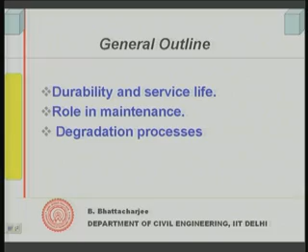Today we shall look into durability of concrete. So far we have looked into strength, and now today we will look into some aspects of durability of concrete, degradation processes and attacks on concrete. In general, the outline of our discussion will be what we understand by durability and service life, then we shall look into role of maintenance and some of the degradation processes.

Let us try to define durability. One thing so far we have understood is that a concrete structure can remain stable, and strength is a factor which actually decides whether it will be safe and stable against horizontal and vertical loading, gravity loading and horizontal loading. But this is one issue, as something strong can also be attacked by various kinds of aggressive agents present in the environment.

So durability relates to these issues. Deterioration can take place because of some chemical attack from the environment. The concrete structure shall survive and serve its function during the period of intended design life. We will try to define the life of the concrete. First of all, we define intended design life. If you remember, we talked about the life of the structures, that it's the life for which the structure should act, for which it should function.

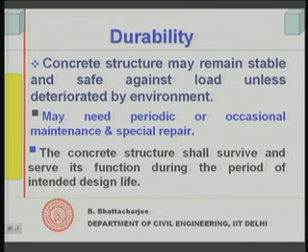There can be several other ways of defining life. Service life is normally defined with respect to elements. Now, we can define the service life in such a manner that it should serve its functions during that period of time satisfactorily. So, in any case, as far as the structure is concerned, it shall survive, should remain stable and serve its function during the period of intended design life.

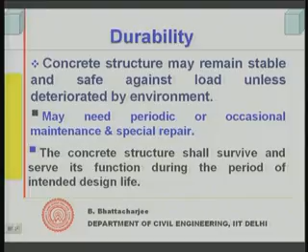And of course, we will be doing some maintenance during that period of time. It is not like you build a structure, whether it is a building or let us say a bridge, and it remains forever without any maintenance. You have to do certain maintenance, and when you do maintenance, the structure should serve its function during the period of intended design life satisfactorily.

Let us formally define durability. Durability of a structure, component, or any material, any product, etc., can be defined as its capability to maintain a minimum performance level over the specified time when exposed to a degradation environment. So what is it actually? Durability is related to environmental degradation.

When you expose a concrete structure to the environment, it would actually be attacked by various aggressive agents in the environment, and this would mean it has to survive such attack during the intended design life period. So durability is related to its capability to survive the environmental degradation and maintain a minimum performance level during the specified time. That is what we call durability.

There is an analogy with a human being. A young person can be very strong, but still can be attacked by viruses or can fall sick. So remaining healthy is the part related to durability. A strong person can also fall sick, or be attacked by virus or bacteria, whatever it is. So when we talk of durability, we talk of that kind of action from aggressive environmental agents. Let us see now.

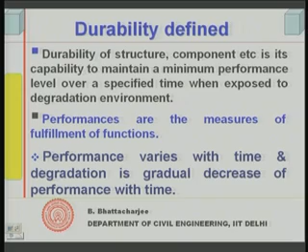So these are some of the definitions with reference to durability. We now understand what performance is, we understand that performance varies with time, and what durability is.

In this context, we would like to define the service life of elements. Let us first look at it philosophically. We think that buildings or structural materials, once produced, are all maintenance free.

Well, they are very unlikely to be maintenance free, because let's say cement, we produce it at the expense of energy, we heat up the raw material and actually embody some energy into this material. So it is not in a stable condition. Stable condition would be when it has dissipated all its energy and has no chance of dissipating any further. Actually, we raise the chemical potential by heating it up, and it would like to dissipate that energy as and when it gets a chance.

So cement reacts with water, dissipating some of its energy, which is why we know that reaction is exothermic. So all the materials that we produce at the expense of energy would like to dissipate it, and therefore they will deteriorate. So concrete cannot be maintenance free.

In concrete, the cement we use has some of its locked-up energy dissipated during the hydration reaction, but still there will be some amount of energy remaining. So altogether it would like to come to a stable state by dissipating all its energy. Given a chance, it would like to react with environmental agents that are present, and get degraded.

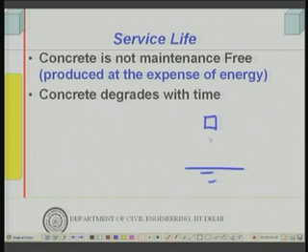An analogy is shown quite often: you can lift a body up. Now if you just release it, keep it in the air, it will come down. This is your ground, you raise a body and lift it up. If you just leave it in the air, it will come down straight away, it will have a direct fall. If you put it on a slope, well...

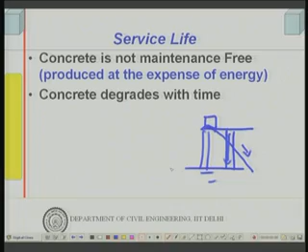It will come down, but at a much slower rate. And if you put a flat surface, built a flat surface and hold it there, it will never come down, because although the tendency in all cases is the same, to come down, the rates are different. So in the first case, when there was no support, the rate was maximum, it quickly came down. When there is a slope, it comes down slowly, and when you put a platform below it, it will never come down.

So the rate can be controlled, although we cannot control the potential or the tendency to degrade. So concrete degrades with time, and therefore one can talk in terms of what is called the service life of a concrete element.

We are talking of service life of concrete elements. Remember, once an element reaches its serviceability limit, and its service life is over, the whole structure is unlikely to collapse. What you have to do is repair it and maintain it properly, then of course the structure will still remain safe.

It has its implication on economics, we will look into that. So, serviceability limit or service life we define with respect to an element, let us say a beam, a column or slab, depending on the specific case of degradation process. Initially it is in good condition, and when it reaches a defined serviceability limit, for example simply the appearance of visible cracks, it will depend upon the degradation process, and when it reaches the serviceability limit, this time we call the service life of the element.

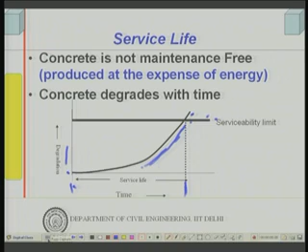This has relevance in durability, and one would like to design an element for appropriate service life. One would like to design service life, and if we see its role in maintenance, this diagram shows the role of service life in maintenance. You can see that initially there was no degradation, the T0 period, and after that possibly degradation starts.

It would have reached the serviceability limit, but one might take a decision that, well, generally much before the serviceability limit, you might do maintenance and bring it back to the original condition. Then again it will deteriorate, and then you have periodic maintenance. So, when you have degradation or deterioration problems of concrete structures, you might think in terms of doing it repetitively, maintaining it repetitively, doing some repair and rehabilitation repetitively till the intended design life.

So a series of repairs, this time you do a repair, this time, and this. This could be one managerial decision depending upon economics and what is called life cycle cost. Every time you do maintenance, a cost is incurred, and this cost can be compared through life cycle cost analysis. But another managerial decision could be, well, you repair it such that instead of following this deteriorating path, it follows a path that lasts for the intended design life.

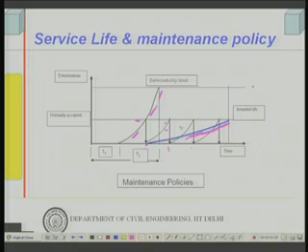In one case the initial cost would be high; where you have many repetitions of repair, the initial cost would be low, but maintenance and repair cost would be higher. So one might take an economic decision based on what is called life cycle cost analysis. At the moment economics is not our business, we are trying to look into the durability problems of concrete, how durability is relevant, but this is the overall relevance of durability in maintenance policy.

Let us see what are the degradation processes and chemical attacks that take place in concrete. If we look at the degradation processes, we will discuss all of them one by one: sulphate attack, then seawater attack and acid attack. So concrete is attacked by sulphate, we will see that in detail, seawater attacks and acid also attacks.

Then carbonation and chloride ingress, these do not directly affect the concrete, but they affect the reinforcement, and it is a very major issue. They affect the reinforcement, and the reinforcement corrodes. As I mentioned earlier, reinforcement normally used is steel, an alloy of iron and carbon, in various forms. This steel is produced with expense of energy. Iron in nature is available as iron oxide, iron pyrite, sulphide or oxide forms, magnetite, hematite, whatever the ores are. So iron, in its Fe state, is never available in nature.

Although in steel it is also in some combined form, maybe in FeC or other combined form, Fe has a high tendency to react with oxygen, forming oxides or hydroxides, because we have produced the steel from ore with expense of energy.

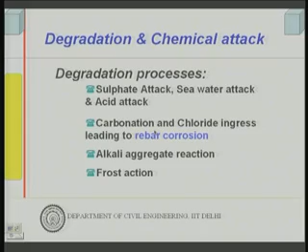Then there are other durability problems called alkali aggregate reaction and attack of frost action in concrete. This is a physical one, others are chemical. Some of those deterioration processes are chemical, some are physical, but it all takes place due to exposure to the environment and aggressive agents coming from the environment in some form or other. That is the degradation process. We will discuss the first two today, and the alkali aggregate and frost reaction we will discuss in the next lecture.

So let us look at sulphate attack first, but before that let us understand one thing - all of this degradation process, whether physical or chemical, generally chemical ones involve presence of moisture and also involve ingress of aggressive chemicals and moisture from outside, and they can be modeled through various diffusion processes.

But at the moment we are not interested in the models, what I want to highlight is the fact that it is the moisture which is very important, and ingress of aggressive chemicals which is also important. So two issues are important: moisture ingress and aggressive chemical. Presence of moisture or water, in vapor form or liquid form, that is most important, and it has to enter into the concrete. We will discuss more when we discuss general issues, but let us look into chemical attack now. Even in case of physical frost action, it is again the water ingress which is important. So either physical or chemical, the role of moisture is very important for durability of concrete.

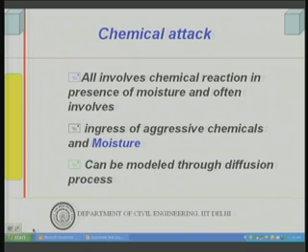Okay, so let us look into some of those attacks like sulphate attack. If we remember, we added gypsum to cement during its grinding process, and why? This is because to control the setting, and when we discussed hydration of cement, we said it is the C3A which reacts quickly with gypsum and forms a compound called ettringite.

So C3A reacts with gypsum, that is calcium sulphate, forming ettringite. Now this reaction in the soft paste or concrete, before setting in plastic concrete, is not a problem at all, because ettringite occupies more volume than its reactants, C3A and gypsum. This does not create any problem in plastic concrete, because this expansion can be accommodated by the plastic concrete - it is in plastic state. So something is trying to push the material apart, it simply allows that movement. So paste in its plastic state can accommodate the ettringite reaction, that is C3A reaction with gypsum forming ettringite.

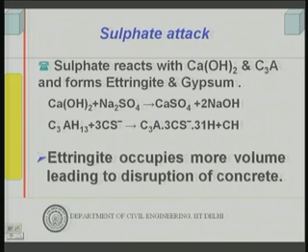That is what is a sulphate attack. If the concrete is exposed to a sulphate environment, such as soil containing sodium sulphate or potassium sulphate, this can result in sulphate attack. There can be several other situations where sulphate is present and sulphate attack could occur.

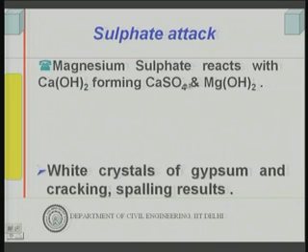Now let us look into another case of sulphate, one specific sulphate, that is magnesium sulphate. Magnesium sulphate reacts with calcium hydroxide, forming calcium sulphate and magnesium hydroxide. So calcium hydroxide concentration reduces, and it forms gypsum, which will then form ettringites. Calcium sulphates would lead to formation of ettringites, and the magnesium hydroxide present causes some other kind of problem.

The CSH gel that we have talked about, which is the cementing material in cement hydrate, is unstable in the environment of magnesium hydroxide. In calcium hydroxide environment it is stable, but in magnesium hydroxide environment it is unstable, and when magnesium sulphate is present, it converts all the calcium hydroxide to magnesium hydroxide. So this CSH tends to decompose in magnesium hydroxide environment, resulting in formation of magnesium silicate hydrate in the long run. This is unstable in magnesium hydroxide environment, and finally this is formed, and it has no cementing property.

So cement in the presence of magnesium hydroxide, the cement hydrates, not only ettringite formation can take place, but at the same time it can also destroy the CSH structure. Therefore, the bonding properties of the cement will be lost. So it is simply even more dangerous; magnesium sulphate is more dangerous than others.

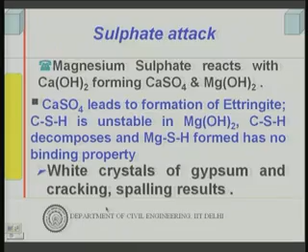Now what are the symptoms? You actually see white crystals of gypsum when such sulphate attack takes place, and you will obviously have cracking, spalling, etc. Sulphate attack finally results in cracking and spalling of concrete, and there is formation of gypsum powder. So you will see white gypsum crystalline powder, together with powder formation. If you scratch the concrete surface, for example the column vertical surface, a little bit, you will find dust and fine powders coming out. You will also find white crystals of calcium sulphate usually present. This is the symptom of sulphate attack, and it can happen in many places.

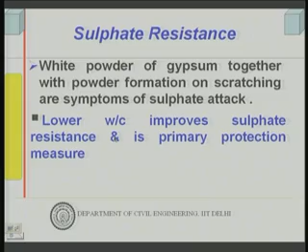How to protect against this? Obviously, lower water cement ratio improves the sulphate resistance, because penetration is required — water has to penetrate because reaction takes place in solution form, and sodium sulphate in solution form has to enter into the concrete. So if you have lower water cement ratio, you will have less porosity, improving sulphate resistance. That is the primary protection measure, but more important is what causes the reaction with sulphate — it is the C3A. Therefore, high C3A cement has higher tendency to sulphate attack, less resistance, but low C3A cement shows better resistance to sulphate attack, and blended cement improves sulphate resistance.

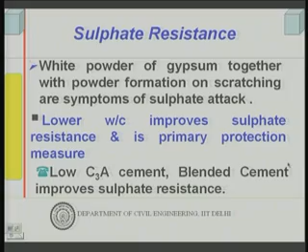Blended cements, such as blast furnace slag cement and other blended cements, reduce the C3A content by a dilution effect. If you use some percentage of blending material like pozzolana, the OPC content reduces, and proportionally C3A will reduce.

Some of them make the cement very impermeable, resulting in a relatively more impervious structure of the cement hydrate, as we observed earlier in our discussion on hydration of cement. Therefore, it improves the sulphate resistance.

Let us now look at seawater attack. What does seawater contain? Seawater contains sulphates as well as chlorides. You have calcium sulphate, sodium sulphate present in seawater, and in addition sodium chloride, etc. So both chloride and sulphate are present.

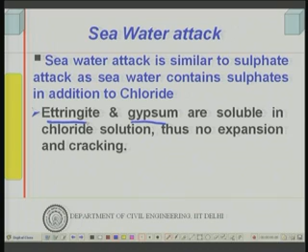Now, the same sulphate will form ettringite, and calcium sulphate formation will take place, but expansion and cracking does not result. The reason is that ettringite and gypsum are soluble in chloride solution. Since they are soluble, the moment ettringite is formed, it dissolves more readily in chloride solution, that is, seawater. Therefore there is no expansion and cracking.

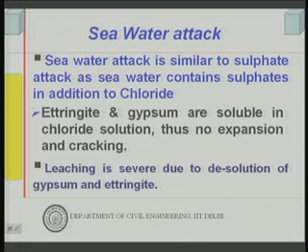But what happens is this results in leaching. The ettringite and calcium sulphate which are formed get dissolved and taken away by the seawater. So leaching can take place and it can be severe. The dissolution of ettringite and gypsum causes severe leaching.

Leaching causes problems because more seawater can then penetrate, and this is a kind of nonlinear effect: leaching allows further seawater penetration, which causes more leaching, and so on.

Where wetting and drying takes place, crystallization of salts can occur in the pores formed by leaching. If this is in the wetting and drying zone, between the highest water level and the lowest tidal water level in the sea, salt gets inside the pores, the water evaporates, and crystallization of salt can exert pressure onto the concrete structure.

This may cause expansion, as crystallization of salts within the pores may cause expansion and therefore cracking. This happens in the zone where wetting and drying takes place, not in a completely submerged situation.

More importantly, reinforcement corrosion can take place, because chloride does not attack the concrete per se, but it initiates the corrosion process of steel in concrete. If the concrete becomes porous, more chloride can penetrate and reach the rebar level, initiating the corrosion process, which is more dangerous. We have discussed sulphate issues; we will come to corrosion a little later.

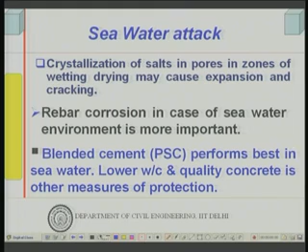Seawater attack can be better resisted by Portland slag cement, which performs best in seawater. Lower water-cement ratio and quality concrete are the other measures of protection. We will see time and again that lower water-cement ratio and quality concrete is the most important feature as far as durability is concerned. We will discuss this in more detail later.

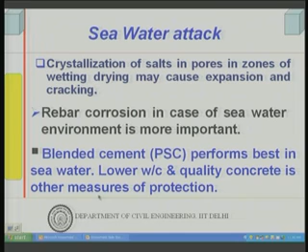Let us look at acid attack. Portland cement is alkaline and therefore will be attacked by acids, because any alkali material is attacked by acids.

Sulfur dioxide, carbon dioxide and other fumes, in presence of moisture, attack concrete. This is the case in industrial situations, because sulfur dioxide and carbon dioxide can react with water forming sulfurous acid or carbonic acid, and sulfuric acid when oxidized. These can attack the alkaline material in concrete, namely calcium hydroxide, sodium hydroxide, and potassium hydroxide. In industrial situations, many other acidic fumes can also attack the concrete.

Below pH 6.5, attack usually initiates and is severe below pH 4.5. This results in removal of a lot of material from the concrete, because the attack causes leaching action, and a lot of material is taken out.

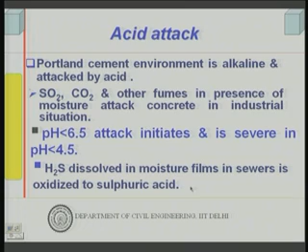One special case is H2S in sewer lines. This, when dissolved in moisture films in sewers, gets oxidized and forms sulfuric acid. So in sewers, at the point between low water level and high water level, you can have attack due to sulfuric acid, which forms from dissolution of H2S in the moisture film and further oxidization of the product. This attack dissolves and removes part of the cement hydrates, leaving a weak mass.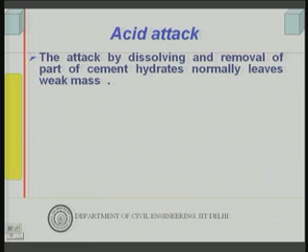The acids attack the alkaline material in concrete and remove those salts that have been formed, finally leaving a weak mass. So that is the result of acid attack.

How will you prevent it? Reduction of calcium hydroxide, in some cases by treatment with sodium silicate, helps in formation of calcium silicate, also called water glass. So treatment with sodium silicate helps in forming calcium silicate within the pores, if required, and reduces calcium hydroxide, particularly if you envisage the concrete will be in an acidic environment.

Other solutions should obviously include a low water cement ratio and quality concrete. Blended cements will also be an important means of protection, as we shall see.

In specific cases where high acid attack is envisaged, in a highly acidic environment, you will need surface treatment, coatings, and pore lining treatment. There are varieties of treatments available for such surfaces. You can give some coating or rendering, a thick plaster sort of thing, or other surface treatments like bituminous or epoxy materials, which can provide protection against acid attack.

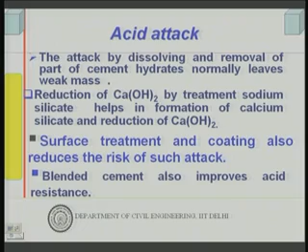Blended cement will also improve resistance against acid attack, because pozzolana in the blended cement consumes a good amount of calcium hydroxide. Thereby acid attack can be reduced, and it also makes the concrete impervious. So this is how we can protect against acid attack.

Let us now look at the next phenomena: service life with respect to corrosion, since the next attack is corrosion. We define service life in a slightly different manner here, in two segments: first a relatively less slope portion, then a rapid slope portion.

Normally cover concrete is supposed to protect the reinforcement bar by not exposing it to the environment. Bare steel, if put into a moist and oxygen-available environment, will undergo aqueous corrosion. Cover concrete in reinforced concrete is supposed to provide protection to the reinforcement bar. But if the cover concrete itself deteriorates or allows something in such that the protection it was providing is no longer available, then corrosion will start.

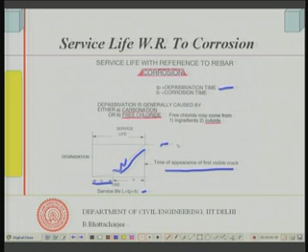Now, how does the protection given by concrete get lost? First we should look into how concrete provides the protection. As I mentioned earlier, iron in steel has a tendency to come to a stable state, so it will get oxidized. This tendency we can't reduce, but what we can reduce is the rate at which it gets oxidized, and this can occur when the pH of the concrete is high.

This is one issue. Second aspect is this protection is provided by formation of some oxide layer over the steel. Now, oxidation we can't stop, but not all oxides are dangerous or detrimental from the point of view of performance.

It can still perform even if some oxides are formed, so long as the iron oxides formed over the steel bar do not consume the iron at a very fast rate or occupy a large volume. So long as it occupies less volume compared to the original volume of the steel, it will not exert any pressure, as we shall see in the action of rusting. But when the product occupies a large volume compared to the original volume of steel, it will exert pressure on the concrete and cause cracking.

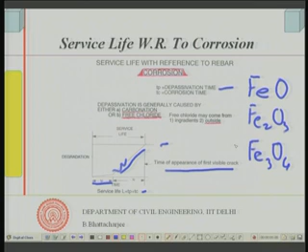So, iron oxides FeO, Fe2O3, Fe3O4 - these oxides form what is known as black rust, and black rust is not so dangerous because these do not occupy large volume compared to the steel.

But if a product like FeOH3 is formed, this is called red rust. This occupies 3 to 4 times more volume than the original steel.

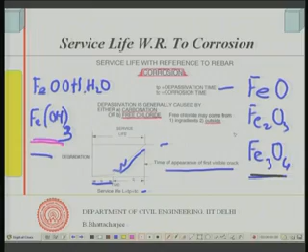So these are black rust, these are red rust. Red rust occupies more volume than the original steel, and this is dangerous. Black rust is not dangerous because it does not occupy more volume than the original steel, so it does not exert pressure onto the concrete. When this coating is formed, it actually passivates the steel, resulting in reduction of the corrosion rate.

So, in certain environments, steel remains passivated. When the pH of the concrete pore solution surrounding the steel bar is high, it gets passivated. In such a situation, black rusts are formed, but at lower pH, red rusts are formed.

So at high pH, since black rust is formed, it gets passivated. But if the pH is brought down by some means, it gets passivated when black rust is formed, and if the pH of the concrete pore solution around the steel bar is lowered, then red rust formation will start. This process we call depassivation.

Passive film formation - Fe3O4 etc., black rust, forms a passive film. When it is broken down, we call it depassivation, which takes place at lower pH. Now, concrete normally will be of high pH because calcium hydroxide is there, and sodium and potassium hydroxides are also there - they maintain a high pH in concrete.

But with time, if carbon dioxide from the atmosphere comes and reacts with the calcium hydroxide present in the concrete, forming calcium carbonate, that process leads to reduction in pH, and we know this process as carbonation, since we have talked about carbonation in the context of shrinkage and also non-destructive testing. We will look at it in more detail.

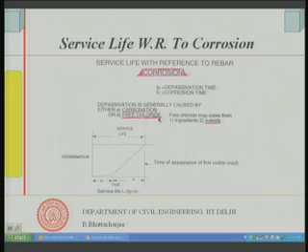This carbonation can reduce the pH of concrete, and other agents can actually accelerate the corrosion process or depassivate, breaking down the passive film or passive layer of black rust - this is called chloride, free chloride, water soluble chloride. So these two agents can actually lower the passivity or break down the passivity of concrete and depassivate it, and then corrosion can initiate.

Now, where does the lime come from? It comes from the hydration of cement. We know that C3S and C2S, when they react with water, form lime. So this lime reacts with the carbon dioxide of the atmosphere, but this all happens in the presence of water.

If there is no water, this reaction will not proceed. It forms calcium carbonate and water, and this process we call carbonation. This chemical reaction results in formation of calcium carbonate, converting calcium hydroxide into calcium carbonate. This is not voluminous, it does not occupy more volume, so it does not cause cracking of the concrete; in fact, it forms a very hard mass.

So if the carbonation front has reached up to this point, it will form a very hard mass up to here. Carbon dioxide penetrates the surface, first the surface concrete will get carbonated, that means calcium hydroxide at the surface will get converted into calcium carbonate.

Once a layer of calcium carbonate has been formed, carbon dioxide will diffuse through that layer, and then the reaction will proceed below it. The carbonation front, as we call it, proceeds from the surface to the inside of the concrete. This is where the carbonation front has now reached, and the reaction continues.

Of course, there are intermediate reactions, because normally there will be sodium hydroxide reacting with carbon dioxide forming sodium carbonate, and so on, but the final product is like this.

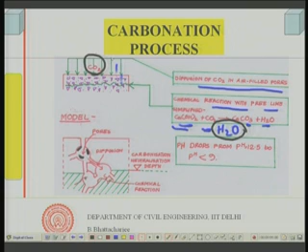Now, how can we stop this carbonation process? Actually, the permeability of the concrete at the surface is most important. If your concrete is impermeable, the carbonation process cannot progress.

It has to be partially saturated, not fully saturated. So impervious concrete is very important, and of course, alkalinity of concrete is important. This would reduce the carbonation process.

Now remember, this carbonation process per se is not a problem. It can cause some error in non-destructive testing, but it forms a hard, strong mass, and it can cause a little bit of shrinkage in some cases, but it does not create any problem otherwise — though it can lead to the process of corrosion initiation.

Now let me summarize this here today, because the processes would continue. We will discuss the carbonation process and its protection a little bit, then look into chloride ingress and rebar corrosion process together with alkali aggregate reaction and frost action, and overall summarize the whole process together in the next class.

So what have we looked at today? We have looked into what we mean by durability, definitions of service life, and the possible processes through which corrosion and deterioration of concrete take place. Some processes we have tried to look into; the rest we will look at in the next class. Thank you.